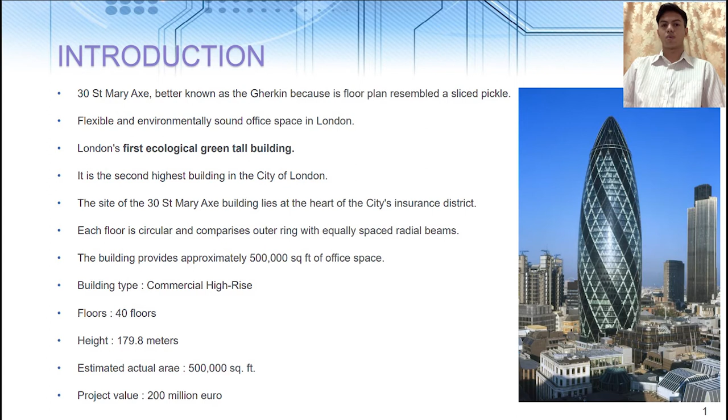Each floor is circular and comprises an outer ring with equally spaced radial beams. The building provides approximately 500,000 square feet of office space. The building type is a commercial high-rise. It has 40 floors. Height is 179.8 meters. Estimated actual area is 500,000 square feet. Project value is 200 million euro.

Page 2. Why was this building chosen? Because this building is a sustainable building. The tower is aerodynamically designed to reduce wind load on the structure, while the lower part tapers so that wind wraps around the tower. Next, the six fingers of accommodation on each floor are configured with light wells between them to maximize daylight penetration. The facade design, with advanced glazing technology, ventilated cavities and blinds, provides up to 85% solar protection.

Next, gas is the main fuel used, hence it will generate half the carbon emission. Last, overall energy saving is up to 50%.

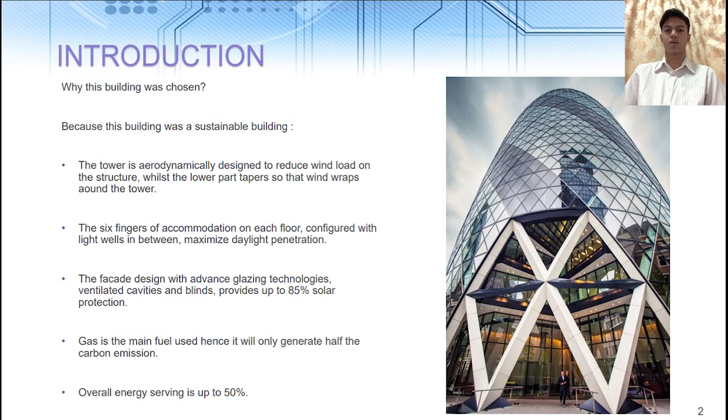Page 3. This section provides a detailed study of the services in St Mary Axe, providing an example of how services could be integrated into a high-rise building. Service detail: St Mary Axe building utilities are located around a circular central core. This allows for uninterrupted floor space for tenants and the ability to maximize daylight from every side of the building.

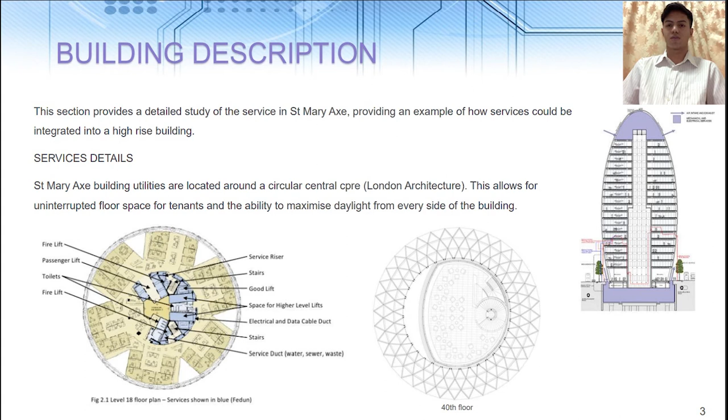As you can see, there is a fire lift, passenger lift, toilet, fire lift, service riser, stair, goods lift, space for higher level lift, electrical data cable duct, stair, service duct, water, sewer, waste. And as you can see, the floor plan at the 40th floor has a cafeteria at the top of the building.

Page 4 is the external view. Number 1, you can see the white glass panels of the building. Second is the roof at the top of the building. And 3 is the dark blue for the windows of the building.

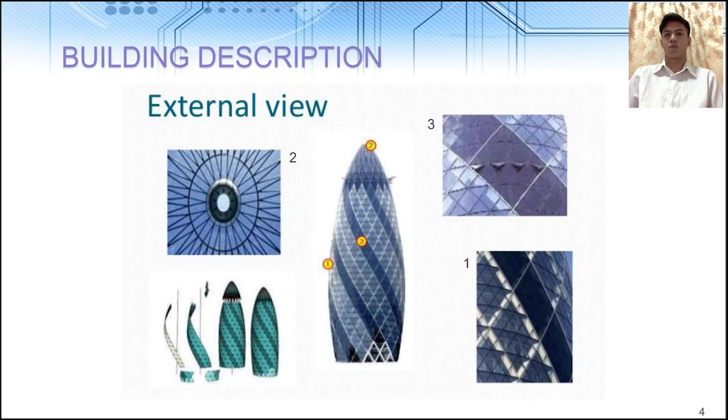Page 5, let's start with the environment. The shape of the tower is influenced by the physical environment of the city. The bullet-shaped building responds to the specific demands of a small site area. And wind: as you can see in the picture, more air flows around the cylindrical structure than a traditional rectangular building.

So as you can see, the cylindrical building has very good wind direction. It's better than a rectangular building. Second, the smooth flow of wind around the building was one of the main considerations.

Next, we go into the sun. The spiraling light wells allow daylight to flood down onto the floors. As you can see, the sun goes from the top of the building through to the bottom. The shafts are essentially light wells, in that light travels down these wells and naturally lights the six radial fingers of the building.

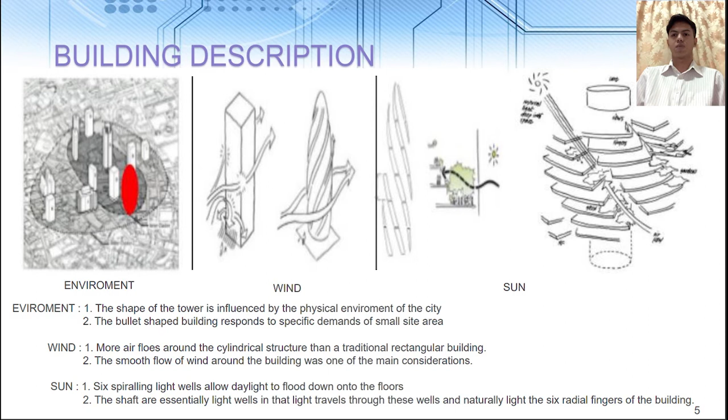Page 6, air lateral loading. These loads are all absorbed through the glass facade and eventually transferred to the diagrid. The pressurized air from the wind passes into the building through a natural ventilation system, which is incorporated through a double skin. As you can see, the blue arrow goes through the facade glass into the building and then gives natural ventilation for the human body.

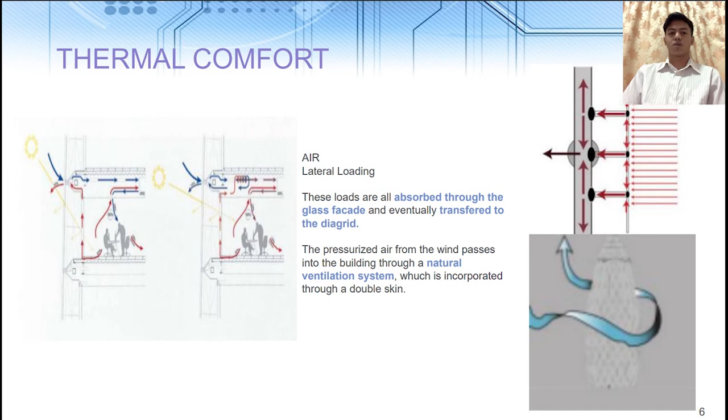Page 7. The human body can be viewed as a heat engine where food is the input energy. The human body will release excess heat into the environment, so the body can continue to operate. The heat transfer is proportional to temperature difference. In a cold environment, the body loses more heat to the environment, and in a hot environment, the body does not release enough heat. Both the hot and cold scenarios lead to discomfort.

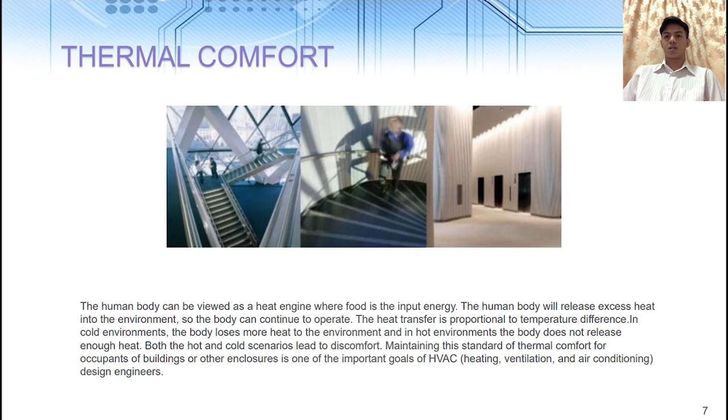Maintaining this standard of thermal comfort for occupants of buildings or other enclosures is one of the important goals of HVAC, that is heating, ventilation, and air conditioning, design engineers.

Page 8. Each floor is rotated 5 degrees from the floor above or below it, allowing up to 6 floors to be attached by vertical light wells.

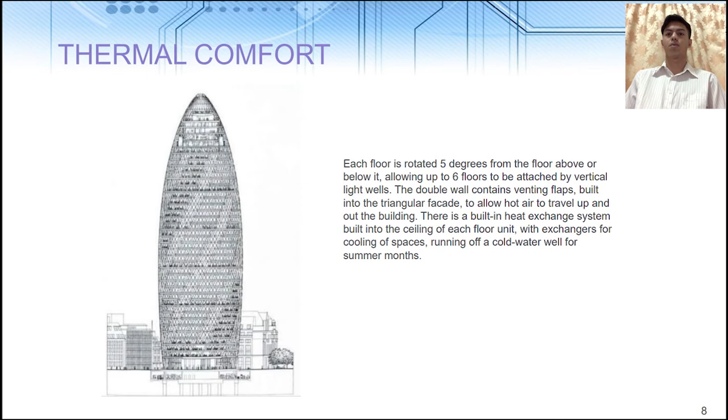The double wall contains venting flaps built into the triangular facade to allow hot air to travel up and out of the building. There is a built-in heat exchange system built into the ceiling of each floor unit, with exchangers for cooling of space running off a cold water well for summer months.

Page 9. Ventilation. 30 St Mary Axe is designed to maximize daylight and natural ventilation so that it uses half the energy typically required by an office block. Gaps in each floor create shafts that serve as a natural ventilation system for the entire building.

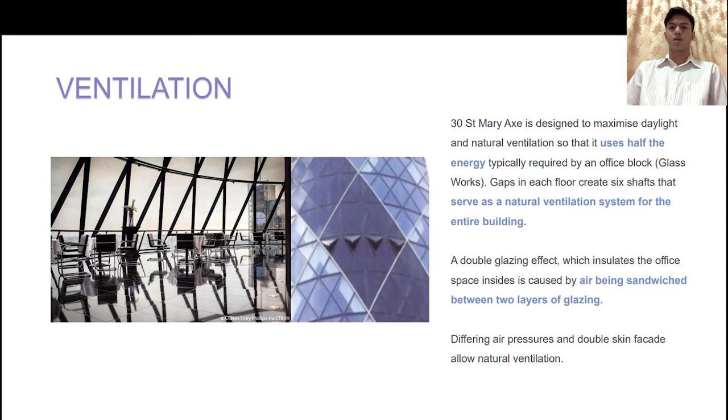Blinds located within the cavity of the ventilated double skin facade intercept solar gain before it enters the office environment. Windows in the facade of the wedges, which open automatically, allow for fresh air to be drawn into the building. As a result, the building uses 50% less energy than a typical prestige air conditioned office building.

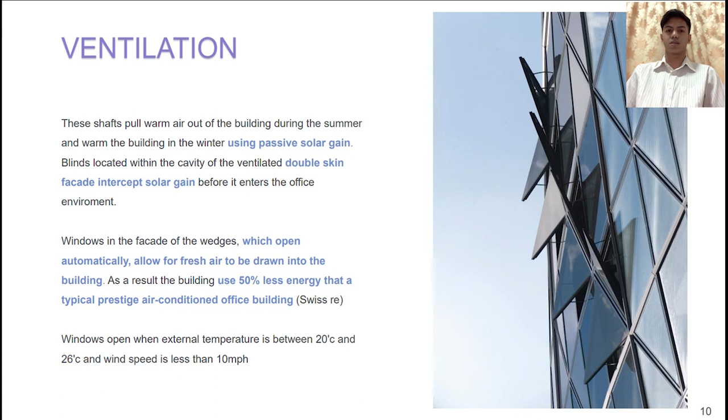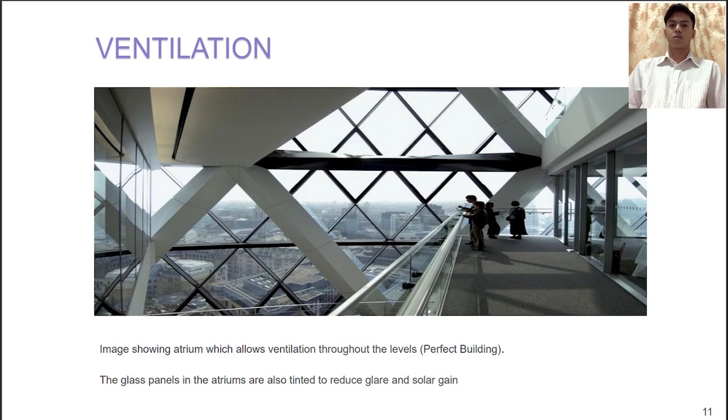Swiss Re. Windows open when external temperature is between 20 Celsius and 26 Celsius and wind speed is less than 10 mph. Page 11. As you can see, the image shows an atrium which allows ventilation throughout the levels of the building. The glass panels in the atrium are also tinted to reduce glare and solar gain.

Page 12. Lighting. Additionally, lights are on light level and motion sensors, reducing unnecessary lighting. All of these help to reduce the building heating and cooling loads and its total energy needs. Within the double skin facade are blinds that can intercept solar radiation at a 15% solar transmission rate, and the building can reclaim heat from the solar radiation or reject it depending on the cooling or heating needs of the building.

The light wells allow daylight to penetrate the building to a further distance inside the building than if they had a floor going all the way to the perimeter, helping to improve the internal environment. Although this light will reduce the need for artificial lighting, some is still required. The building has also been equipped with motion and light level sensors to prevent unnecessary lighting.

As you can see in the big image, the sun is going to throw light down the building by using the shape of the building, like the spiraling building is going to throw it down the building. And the small image is showing light penetration into the building.

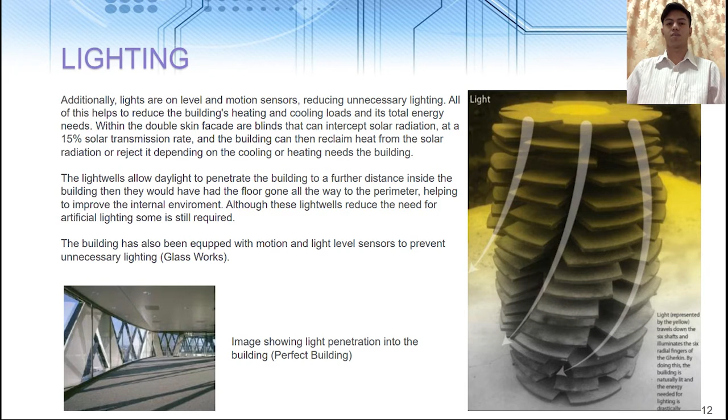Page 13, lighting. The egg shape of the building not only reduces the amount of volatile winds at pedestrian level, but with smoother airflow through the area, there is less heat loss over the surface of the building. The low pressure system also allows the designer to have large light wells at height that would be otherwise unfeasible. 6 spiraling light wells allow daylight to flood down onto the floor.

The primary methods for controlling wind-excited sway are to increase the stiffness or increase damping with tuned active mass dampers, as designed by Arup. Its fully triangulated perimeter structure makes the building sufficiently stiff without reinforcement. Despite its overall curved glass shape, there is only one piece of curved glass on the building, the lens-shaped cap at the very top.

On the building's top level, the 40th floor, there is a bar for tenants and their guests featuring a 360-degree view of London. A restaurant operates on the 39th floor and a private dining room on the 38th. Whereas most buildings have extensive lift equipment on the roof, this was not possible for the Gherkin, since a bar had been planned for the 40th floor.

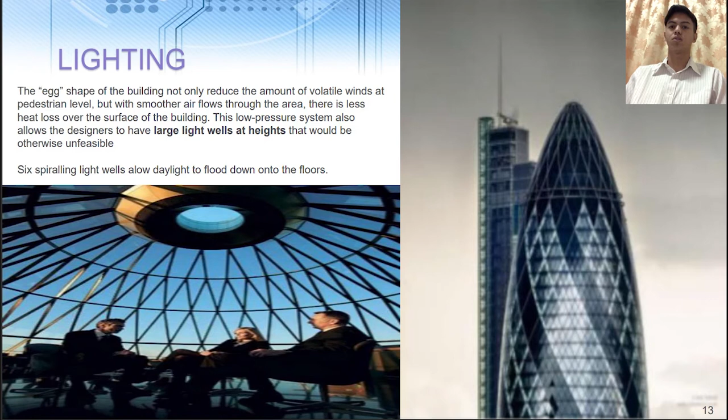Page 14. Acoustic. The building is composed of a double wall system. The outer wall is a double glazed wall composed of mullions and triangular shaped window pieces. The inner wall is made of sliding glass doors, accessible only by maintenance. In between the two walls is a space and a row of horizontal shading devices.

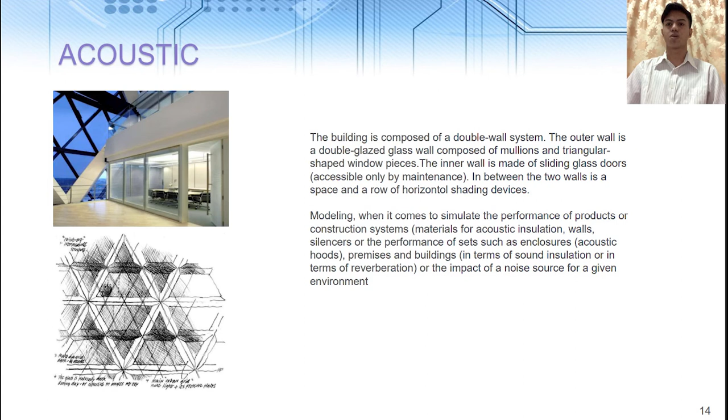Modeling, when it comes to simulating the performance of a product or construction system. Material for acoustic insulation: walls, silencers, the performance of sets such as enclosures, acoustic hoods. Premises and buildings in terms of sound insulation, or in terms of reverberation, or the impact of a noise source for a given environment. Page 15.

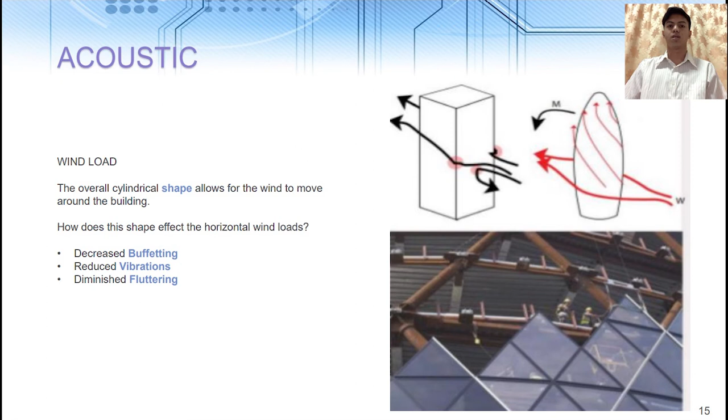Acoustic. Wind load. The overall cylindrical shape allows for the wind to move around the building. How does this shape affect the horizontal wind loads? Decrease buffeting, reduce vibration, diminish fluttering. Page 16. Acoustic.

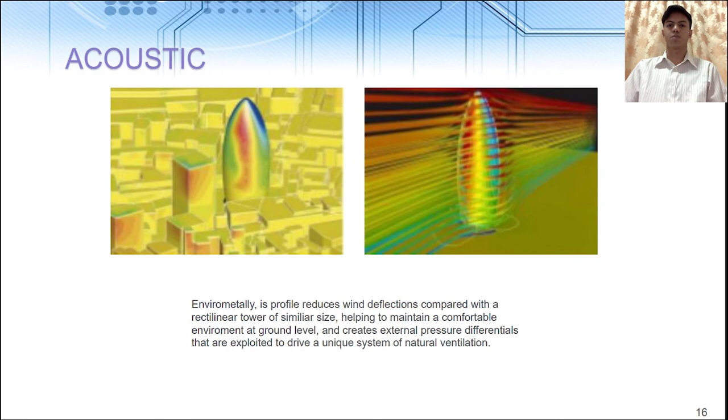Environmentally, its profile reduces wind deflection compared with a rectilinear tower of similar size, helping to maintain a comfortable environment at ground level, and creates external pressure differentials that are exploited to drive a unique system of natural ventilation.

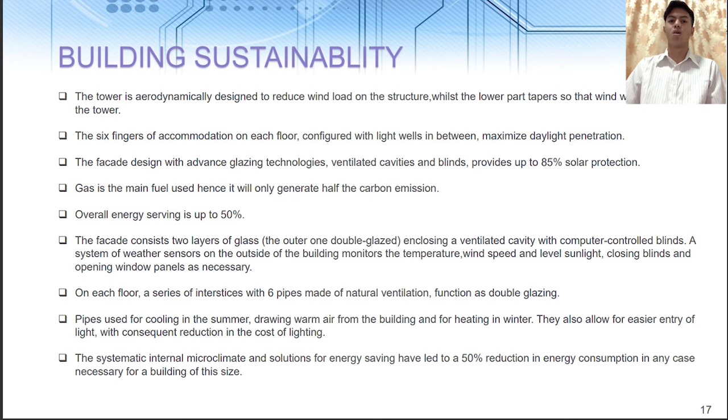9. The systematic internal microclimate and solutions for energy saving led to a 50% reduction in the energy consumption otherwise necessary for a building of this size.

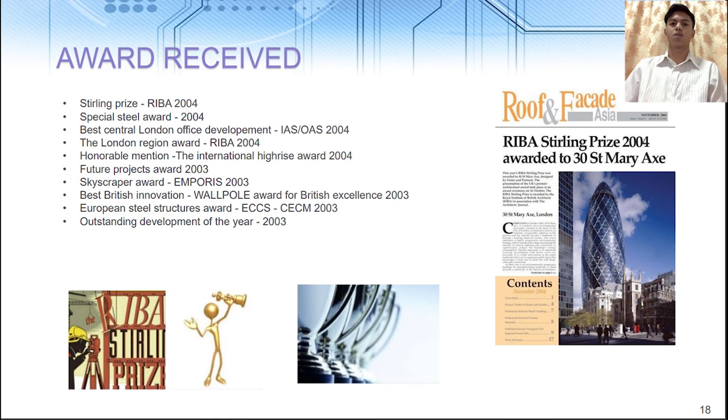Future Project Award 2003. Skyscraper Award, Emporis in 2003. Best British Innovation, Walpole Award for British Excellence in 2003. European Steel Structure Award in 2003. Outstanding Development of the Year in 2003.